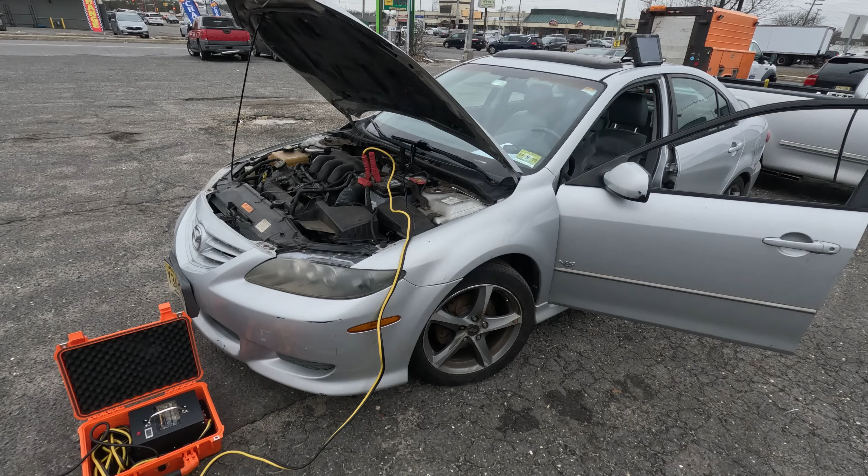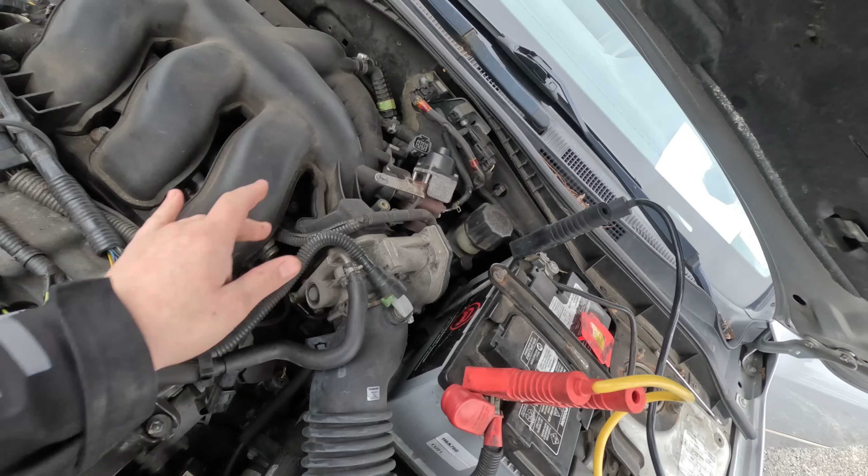I've got here a 2005 Mazda 6. Customer complaint, it's a crank no start. He has the EGR unplugged because he said it was ticking, or getting hot, he's not sure. Now there is a code for the crankshaft, but he said he checked it with a scope and he is getting a signal.

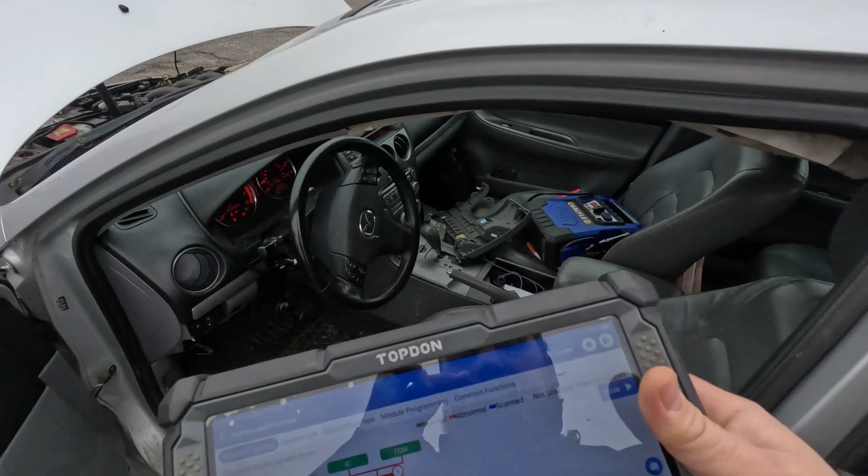So I don't know, I'm gonna have to look at that. So I did a code scan. And we have one code. We had two, but I erased them. This is what came back.

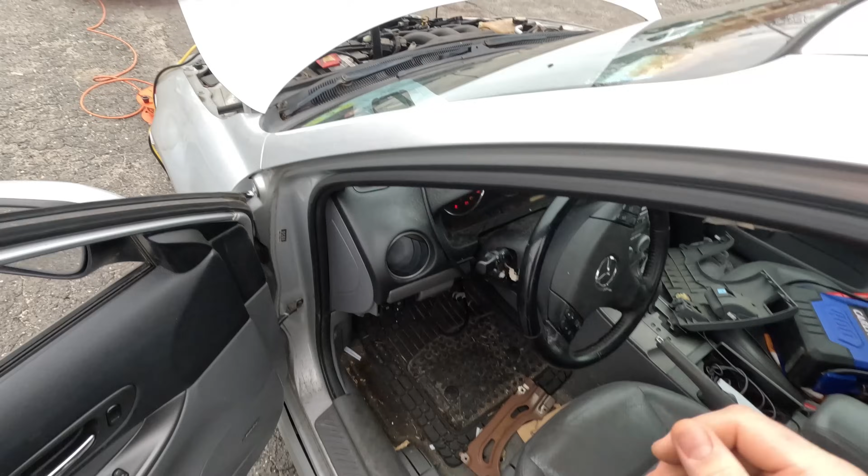P0335, crankshaft sensor circuit malfunction. The car is actually not a crank no start, it like starts and dies. Which is like, doesn't feel like a spark issue. It's right.

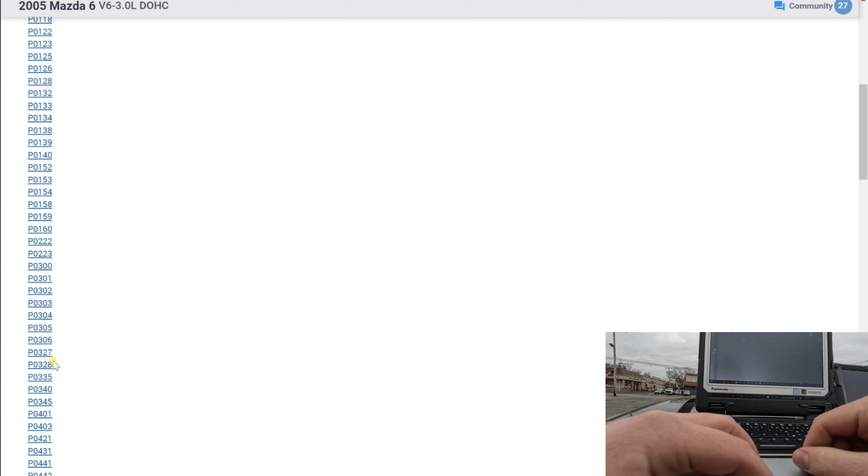Trouble codes, P0335. Okay, so it says here, let's just zoom in on this detection condition: if the PCM does not receive the input voltage from the crankshaft sensor for 4.2 seconds when the mass airflow is 1.95 grams a second or above, the PCM determines the crankshaft circuit has a malfunction.

This is a continuous monitor. MIL illuminates if PCM detects above malfunction during first drive cycle. Okay, so now this thing actually came back right after I cleared it, so even before I cranked the car.

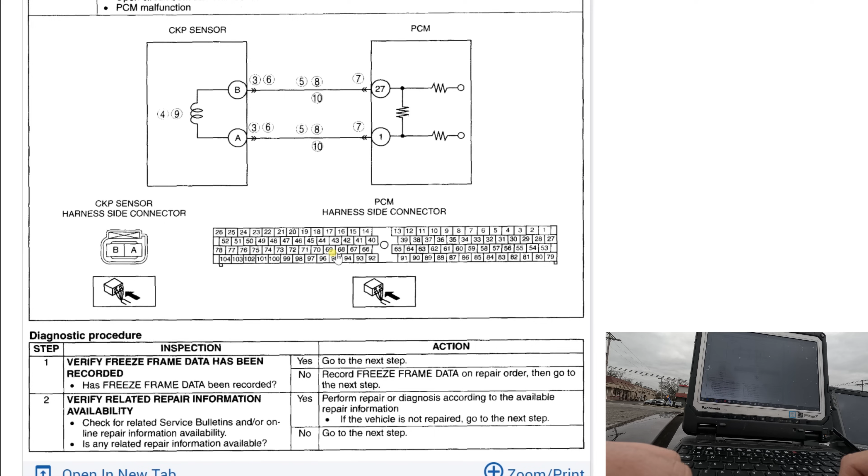That's funny, it's a pretty simple circuit. It's just a 2-wire sensor and goes to the PCM. So they're saying possible causes: crankshaft sensor malfunction, connector or terminal malfunction, crankshaft sensor is dirty, crankshaft sensor pulse wheel malfunction, short to ground.

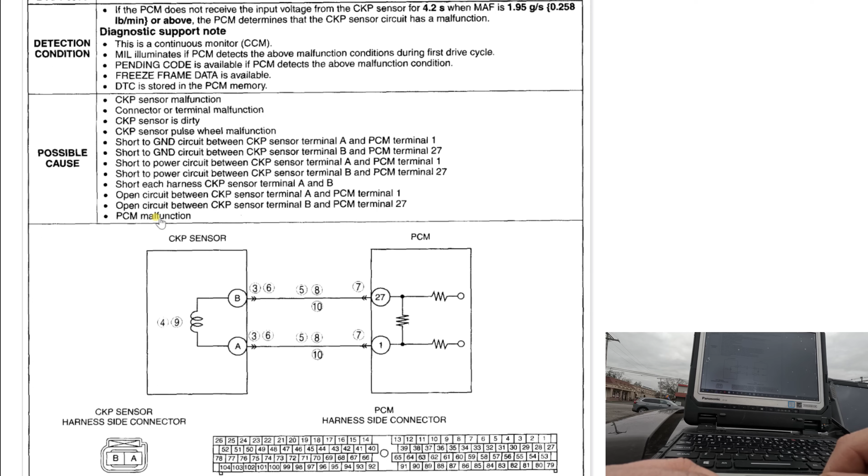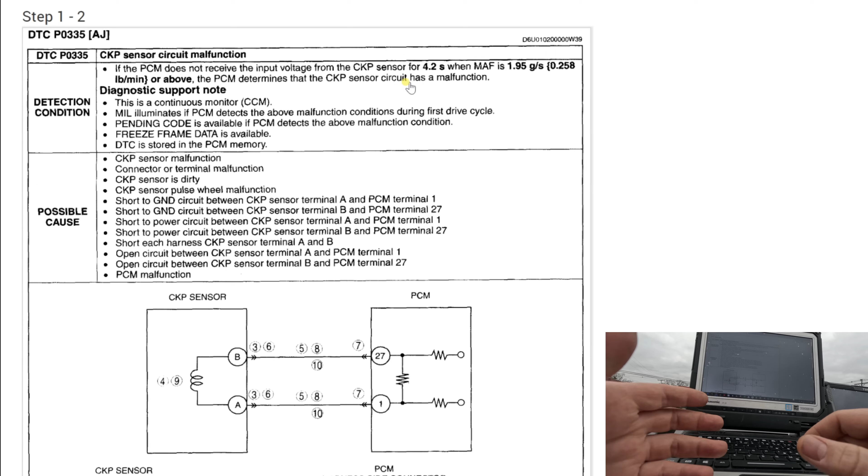So let's see, I would assume that there's definitely some sort of bias voltage on this wire, so it knows if it's open. So I would assume that's probably our problem and not the sensor signal, because how would it know with the car off?

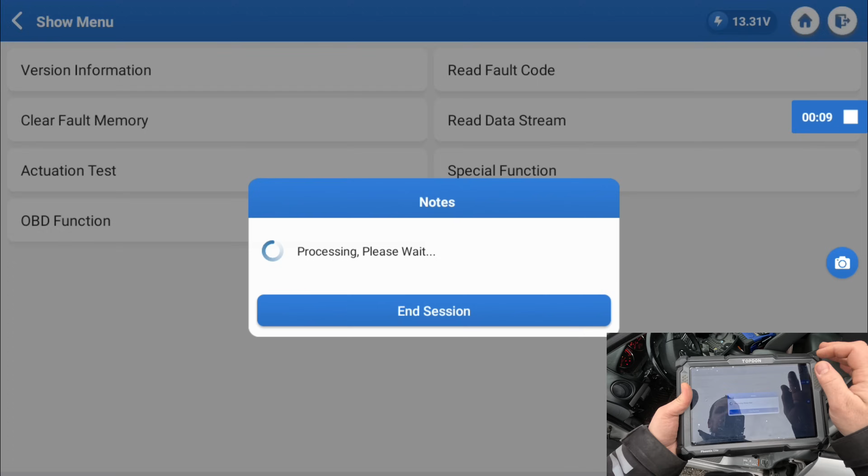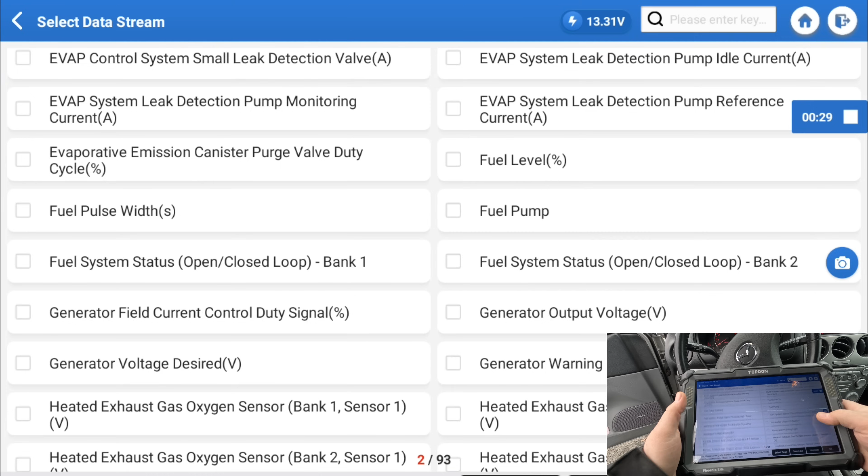All right, so I want to just check if the mass airflow is reporting anything. All right, so let's see here. Mass airflow volts, grams a second. Let's just see if there's anything on that. So there's nothing. Now when I crank it, it shoots up to 3 for a second and then shuts off.

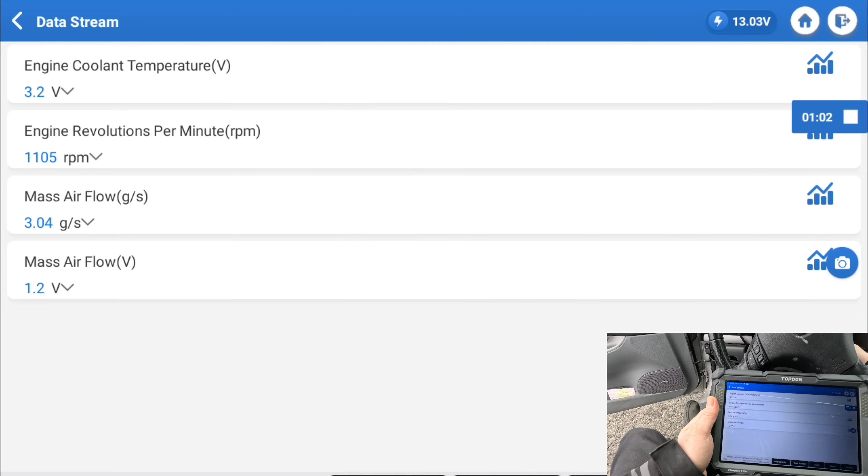And we're getting an RPM signal, so I don't... The RPM signal has to be coming from the crank sensor. I don't know, someone's telling me there's not a crank sensor problem. I don't know why the code's on.

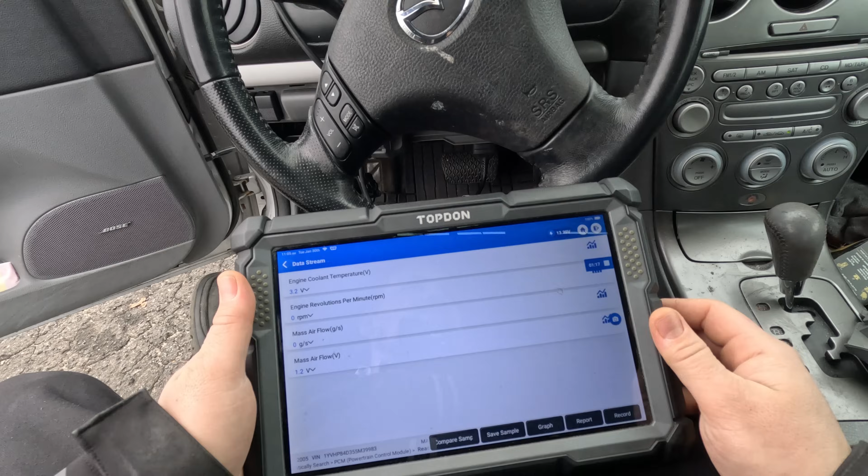Now, there is a remote starter on this, but there's no theft light. Just the way it starts and dies, that's telling me that there is spark.

Okay, let me try unplugging the mass airflow, because it claims the whole code comes from: the PCM does not receive the input voltage from the crankshaft sensor for 4.2 seconds when the mass airflow is 1.95 grams a second or above.

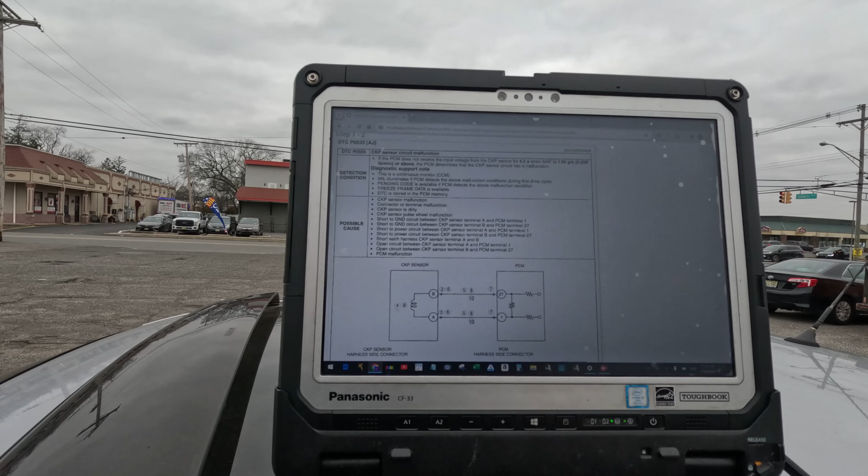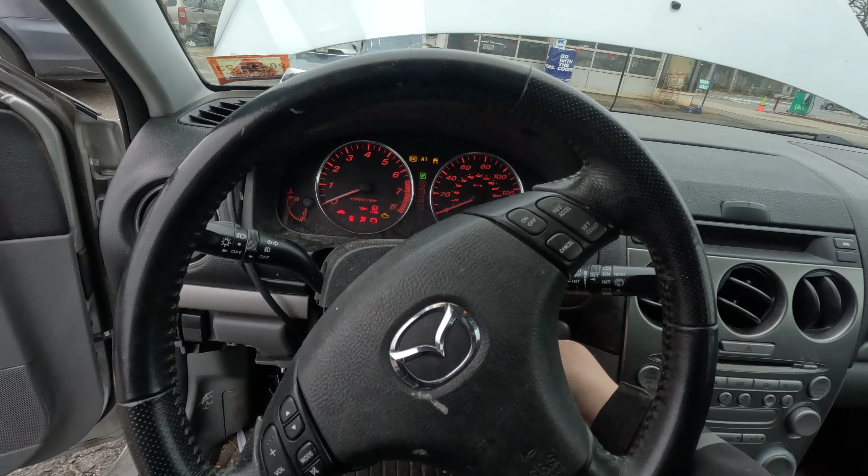So let's just unplug it. It's actually a Duralast, it's definitely not OEM. Let's see if the thing starts now. That's it, it's running.

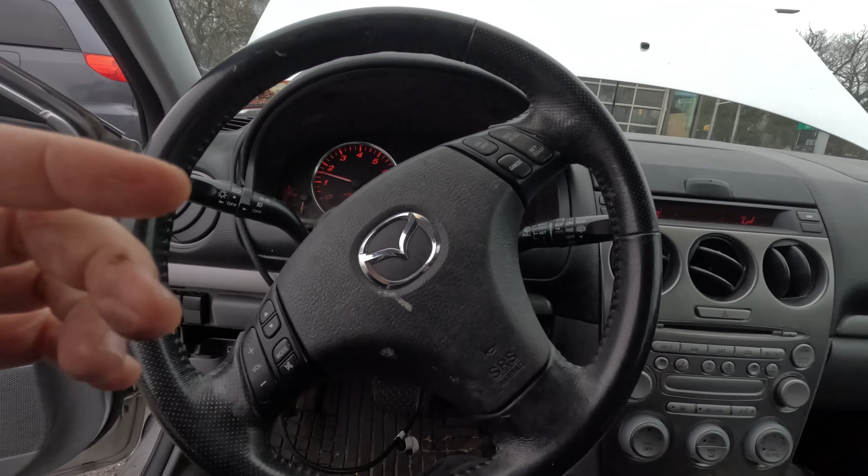Battery light's on. I have a maintainer on it. That is so weird. So it's running without a mass airflow.

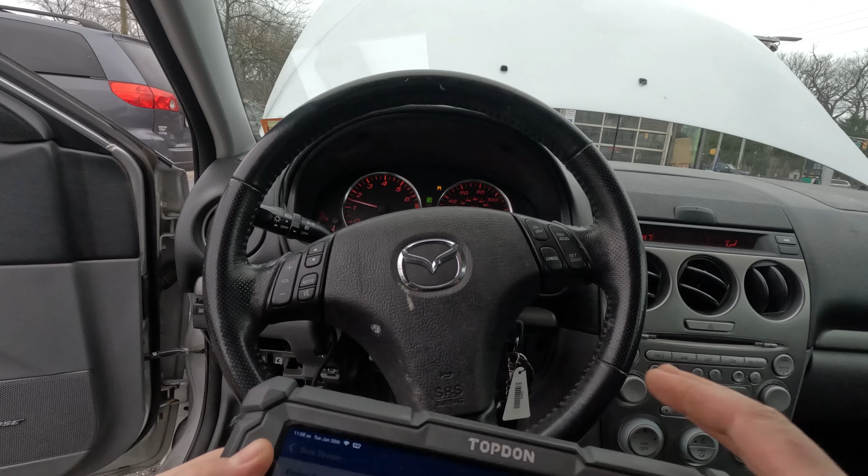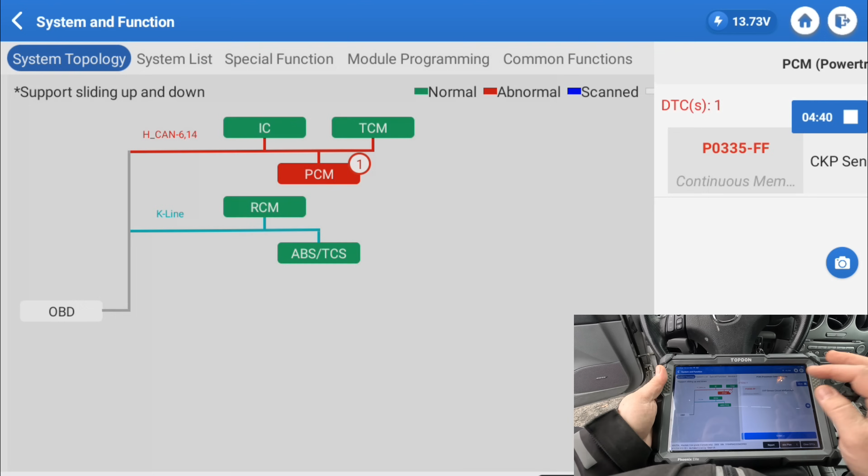Let's see where this thing's holding. Let's clear the code. It stalled the car, I cleared the code and the car stalled.

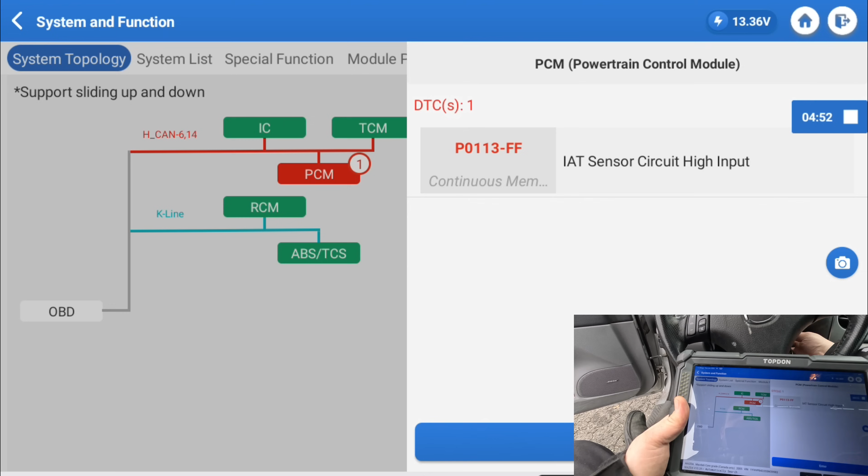Intake air temperature sensor circuit high. That's from the mass airflow. Let's... okay, no codes. Let's crank it.

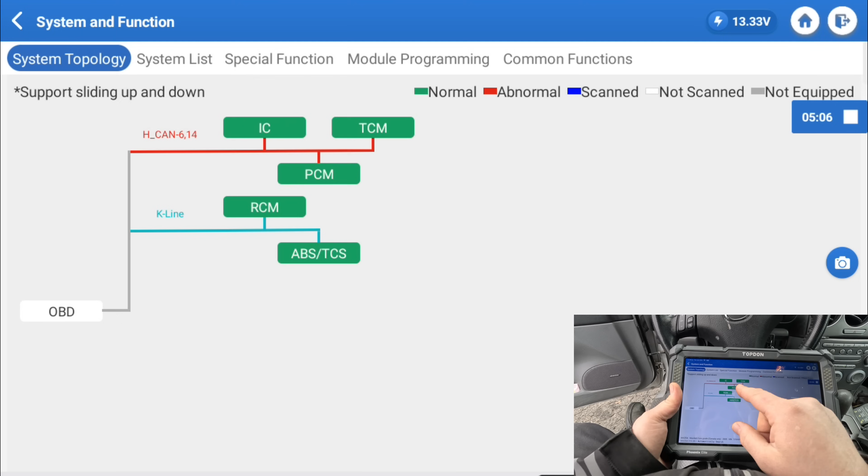Let's go like this. Last time the code for the crankshaft sensor came right back. It didn't come back now. Does the car start? The car starts and runs. But I did get a code, so let's rescan this.

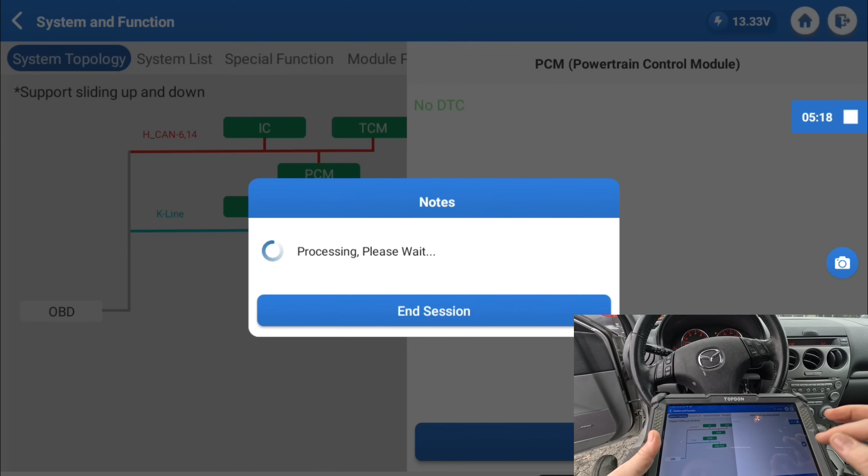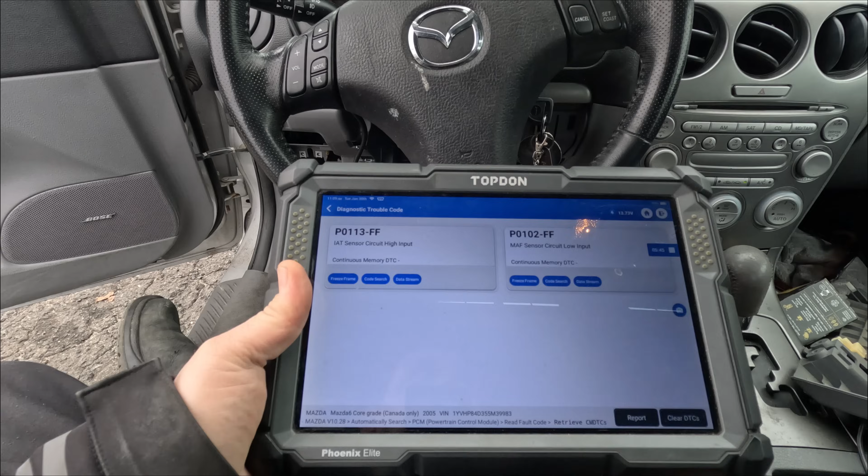Read fault code. Continuous. Mass airflow sensor circuit, intake air temperature sensor circuit. I think this is a bad aftermarket mass airflow that was tricking the computer and sending a 335.

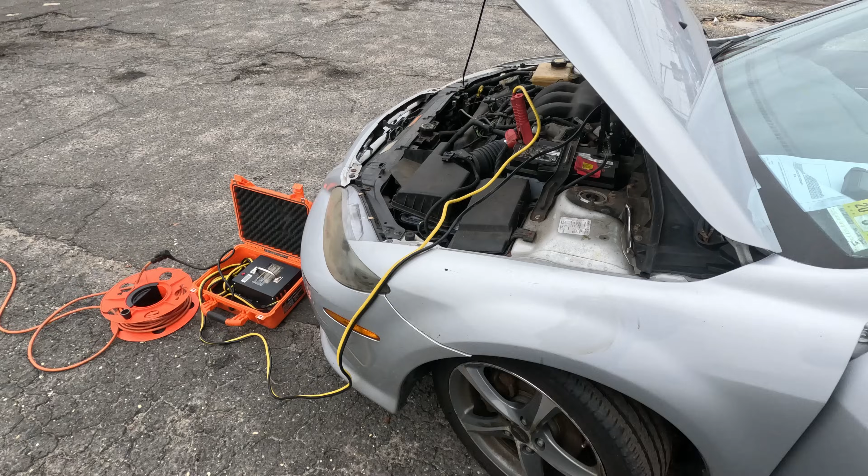I'm gonna go ask the shop owner if he has the original one. Okay, so the shop owner said he replaced this about a year ago, so he said he could order another one.

What I'm gonna do is I'm gonna plug this in, which makes sense. It's gonna stall, that's normal, a lot of cars stall. I'll just see if it restarts. I just want to check.

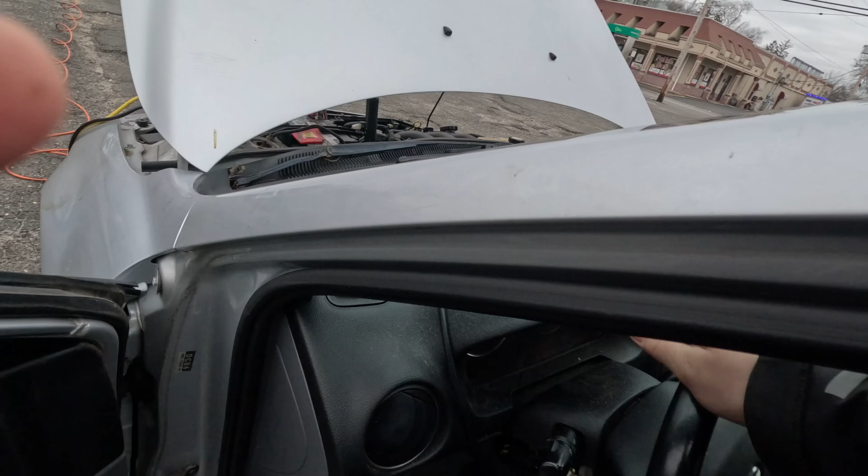Yeah, now it's starting and dying again. And we probably have the crankshaft code. Let's look again.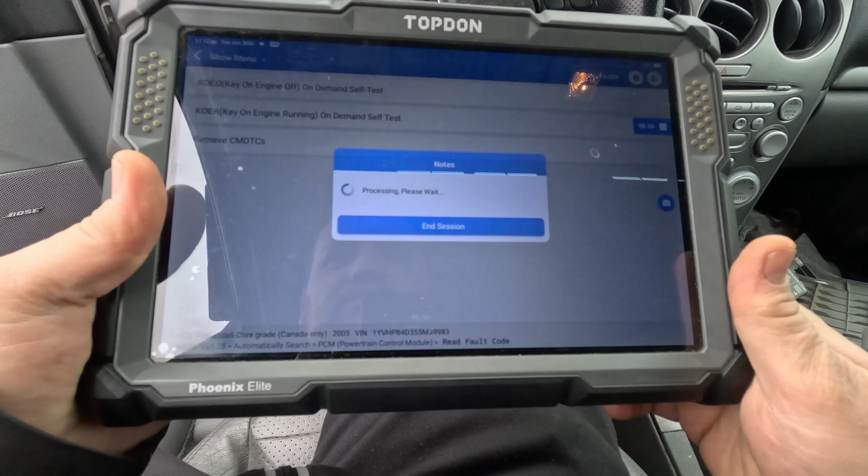Crankshaft sensor circuit malfunction. This is because it's unplugged, I'm not getting involved, I don't know why. That's separate. These two are from the mass airflow, and this one is because the crankshaft code's back.

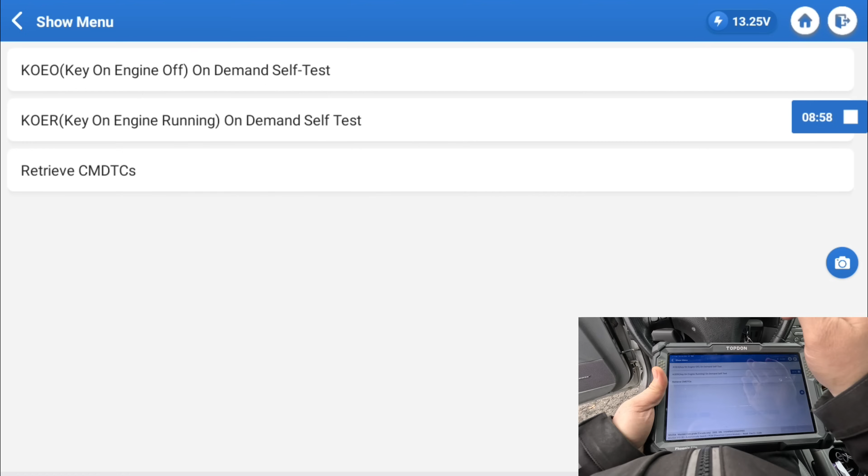So now I want to see in global OBD data. Actually, there might be an OBD function. This doesn't substitute values, I want to see if we're actually getting a signal from the mass airflow. So where are we? Enter.

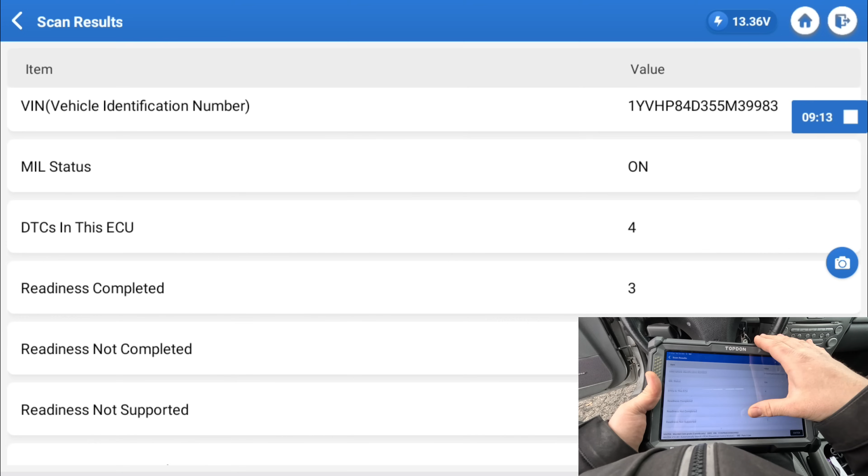Read live data. We're not getting anything, we're getting 0 grams a second. So does it show me the voltage?

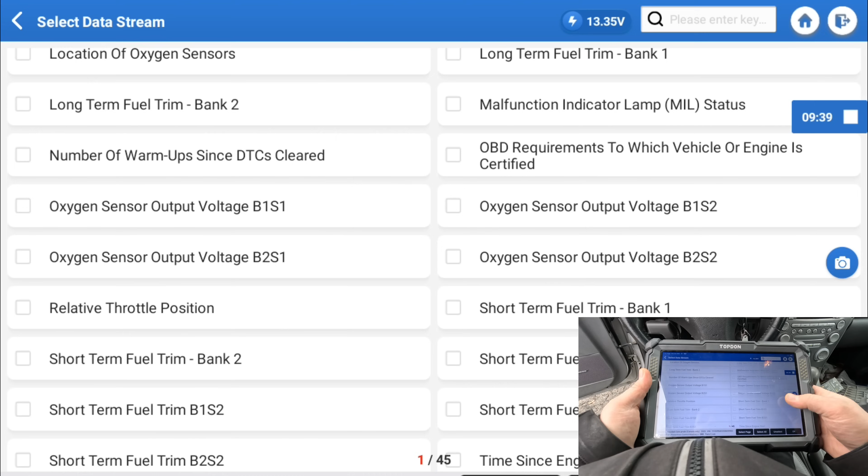Okay, so it doesn't show me the voltage, but over here I did have the voltage. Read data stream - I just don't know what's good or bad. I'm going to try to look into that. Engine, where is it? Mass airflow.

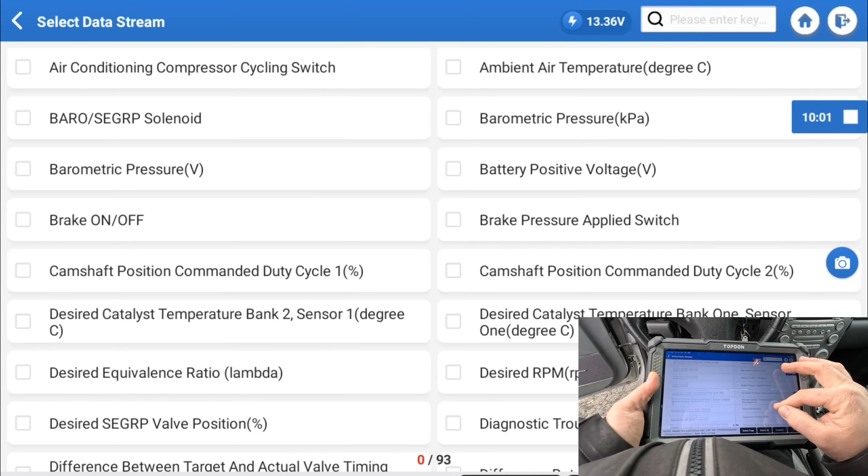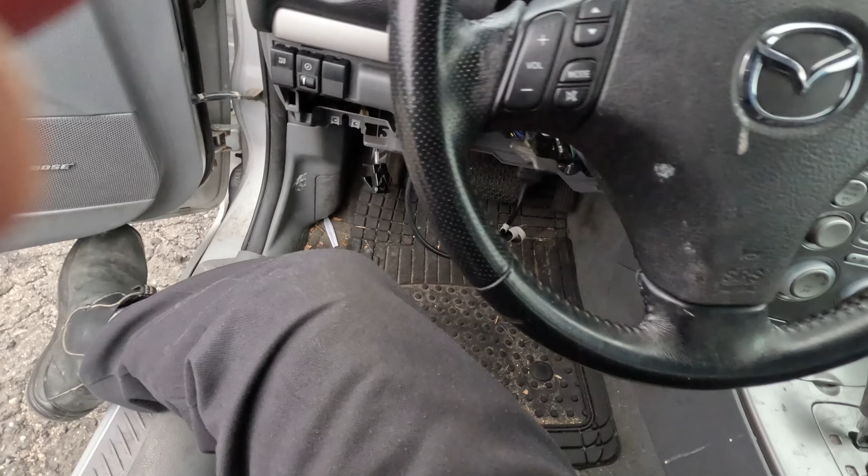So over here, the voltage is 1.2 volts. I'm going to look at service information and see if that's normal for the car off. But when I unplug it, it goes to 0, which makes sense. So it means the computer's not substituting it.

See, now it's at 0 volts. I might have to clear the code. It's starting and dying. Alright, it's running again.

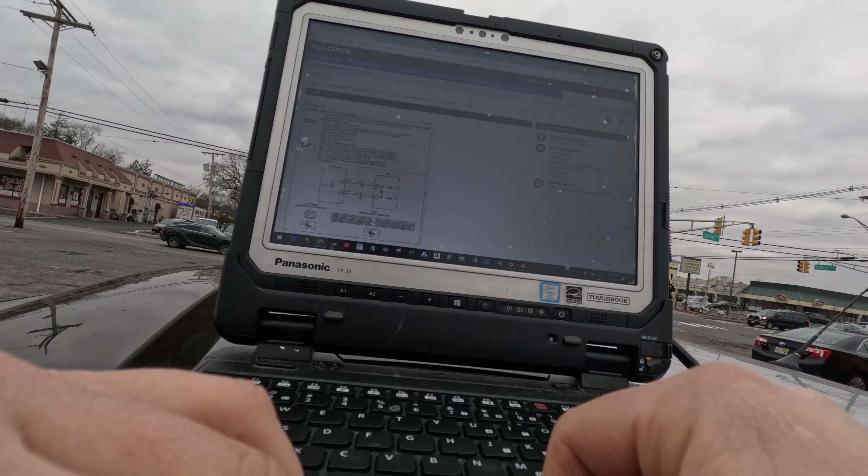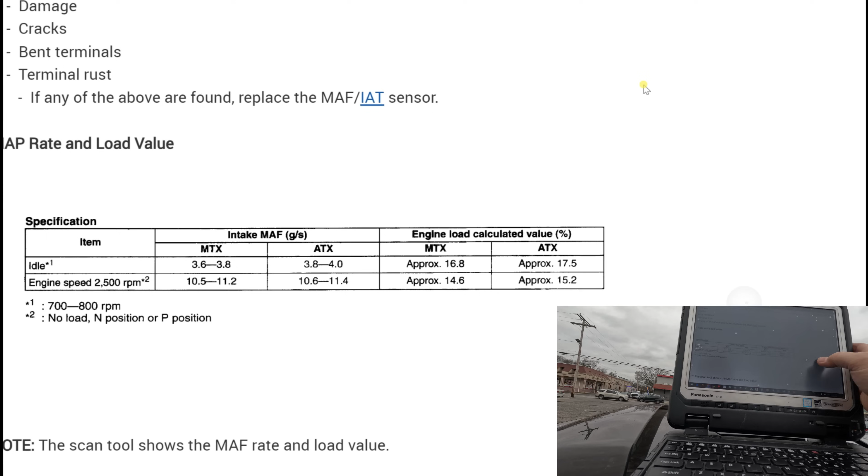Let me look around in service information. Let's look up the mass airflow sensor circuit. Mass airflow rate and load, grams a second. Yeah.

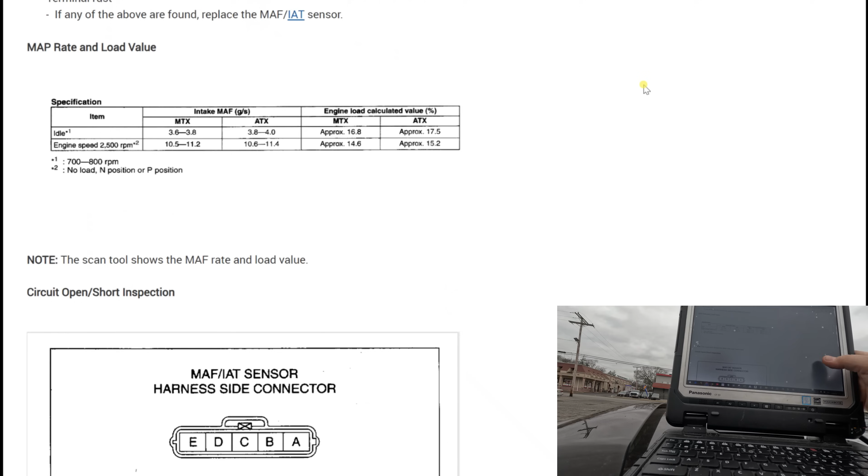Not telling me much. This is just that load. Let me just look up Mitchell, sometimes they're better at this.

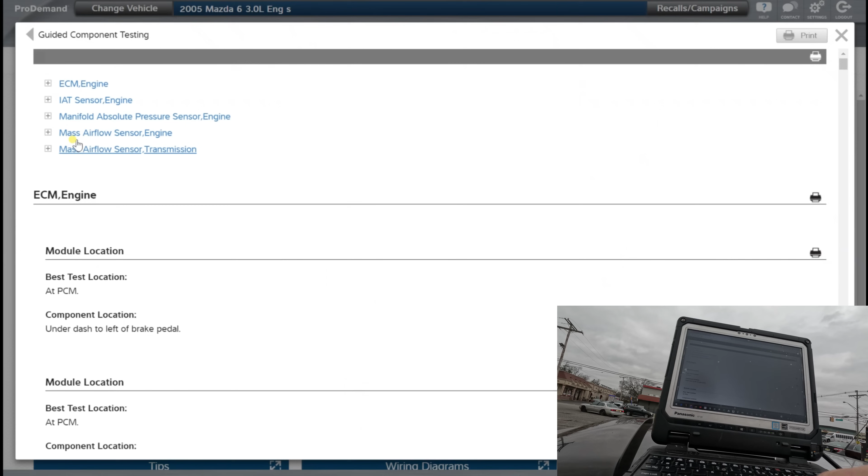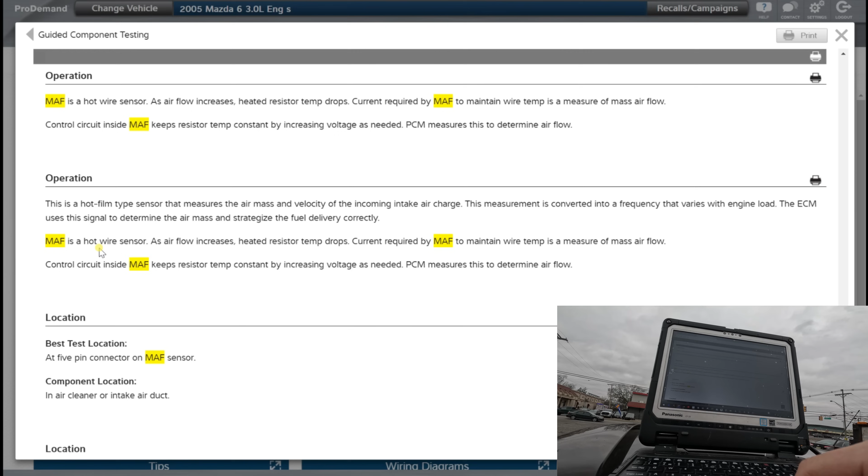As airflow increases, current required by MAF to maintain temperatures. Okay, fine. Hot film type sensor is converted into a frequency that varies with engine load. ECM uses the signal to determine the air mass and strategize the fuel delivery correctly.

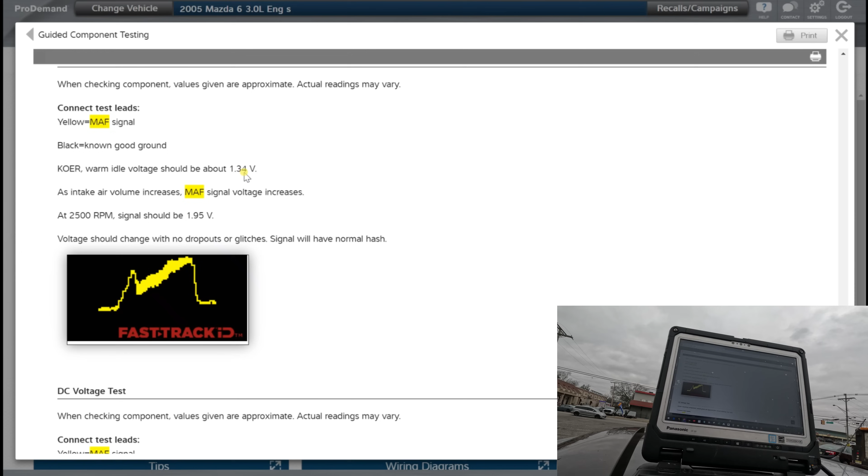Okay, key on engine running. Warm idle should be at about 1.34 volts. I don't know. It definitely seems like this is causing our issue.

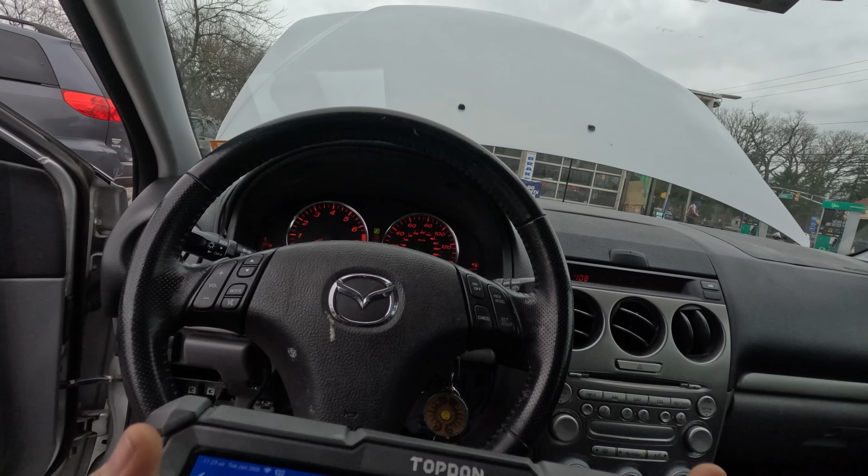One thing to do, I forgot to check, is the throttle - just to make sure the accelerator pedal's not in clear flood mode. Let's go to read data stream. Here, accelerator pedal, we'll go to throttle. Should be enough.

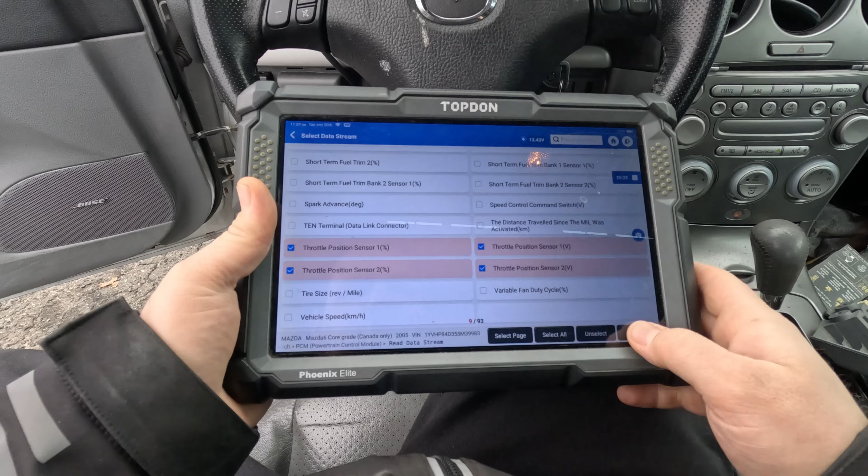Okay, so the actual position's at 0. When I go down, it goes all the way up. So that seems to be working.

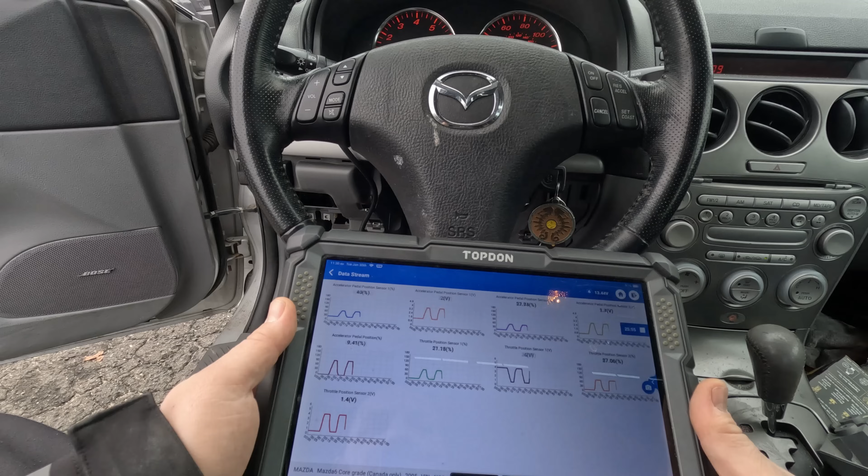Let's actually crank it with the throttle down. Alright, so that's clear flood. That seems to be working fine. Still get the start and stall.

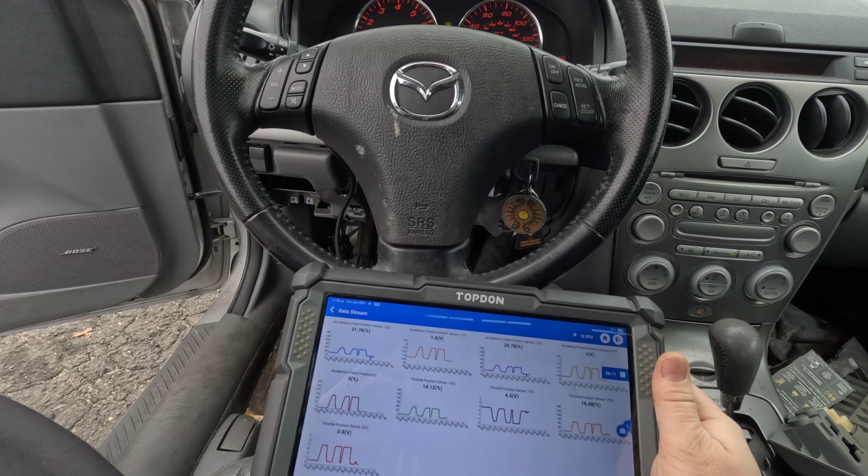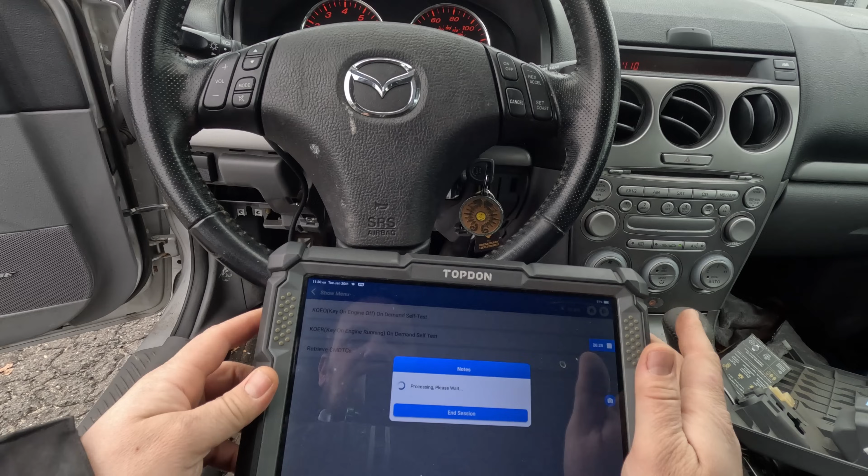And what's the code we have now? Read fault codes. We have the crankshaft code. Let's just unplug it again, see if I get it to start one more time.

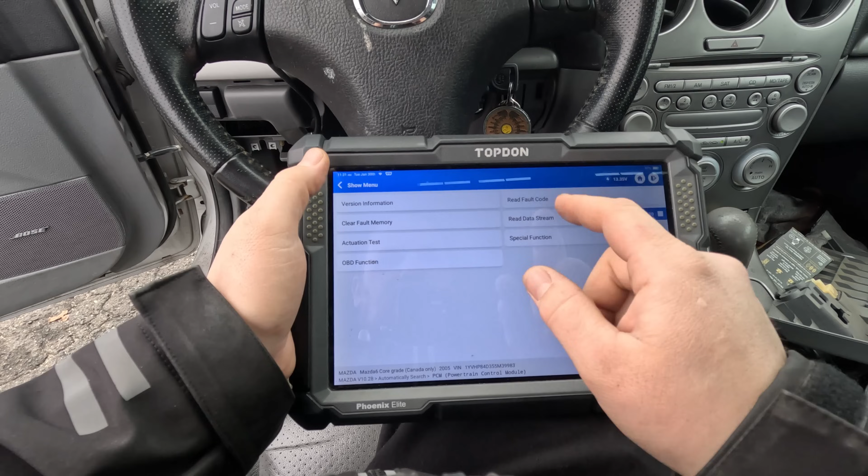Alright, now it's running. Let's see - read fault codes, let's just see if we have the crank code. We're gonna have it. I don't want to clear the codes because it's gonna stall. So let me just read data stream, let's just see if everything looks good. Otherwise...

Car revs up. Just want to know, because the battery light's on, so I want the generator.

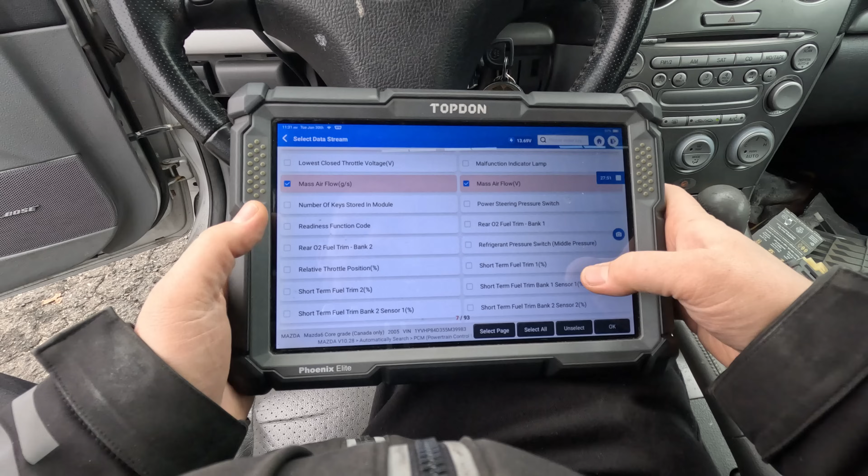Mass airflow, we're not gonna have anything. Short term. Alright, desired RPM is at 900. That's what it looks like we're at. We're in open loop because we have no mass airflow.

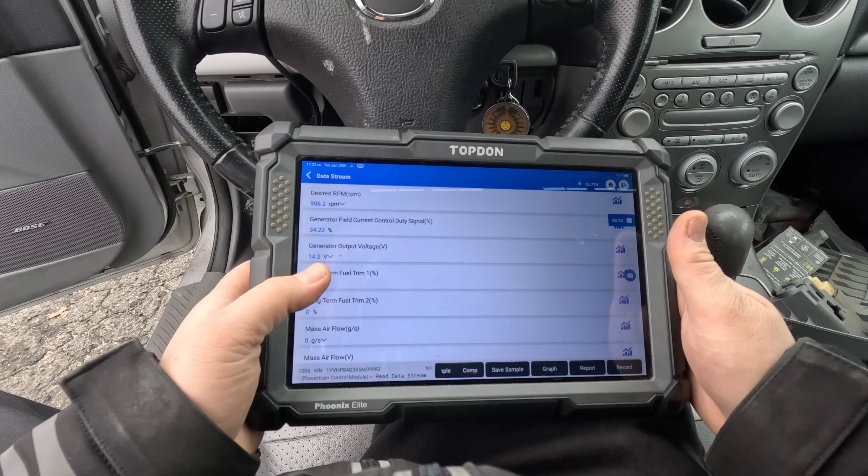I don't know why the battery light's on. Let me disconnect my maintainer and see if the battery light goes off.

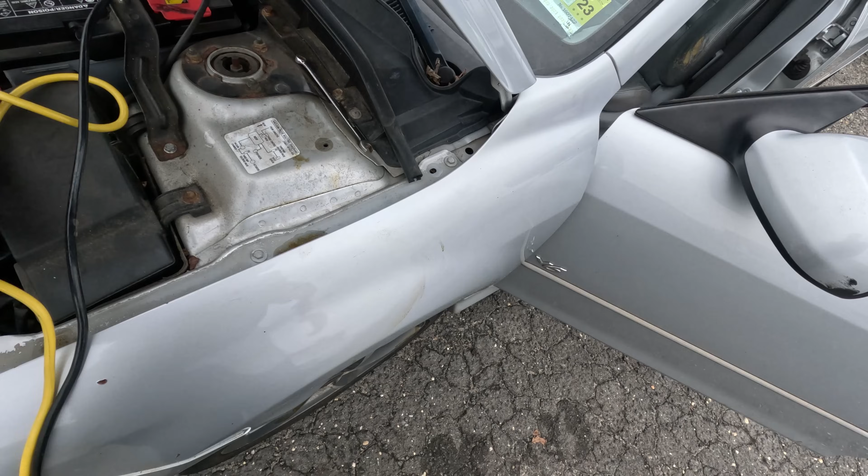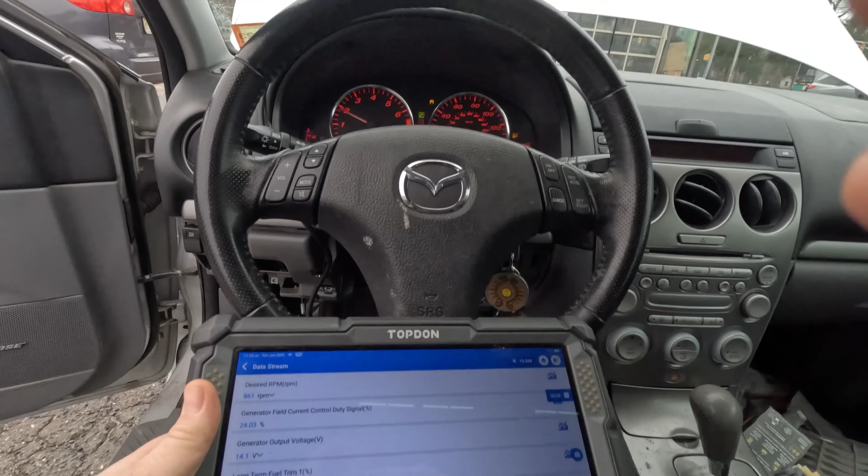We're still charging, so I don't know. It's up to them if they want to fix that. It could be just because of the mass airflow.

I think we got to fix one thing. I think this is definitely our issue. I'm going to see what happens. I'm going to ask them if they ordered a new one.

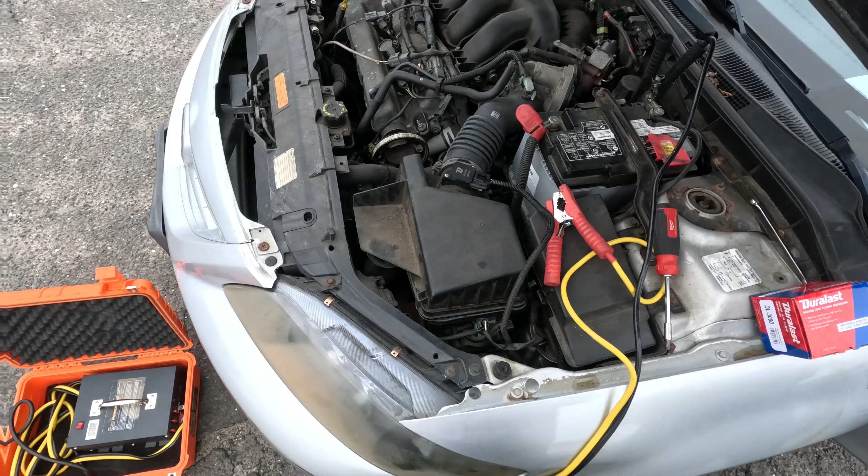Alright, so we put another sensor in. It's also a Duralast, so hopefully it'll be better. Keys on.

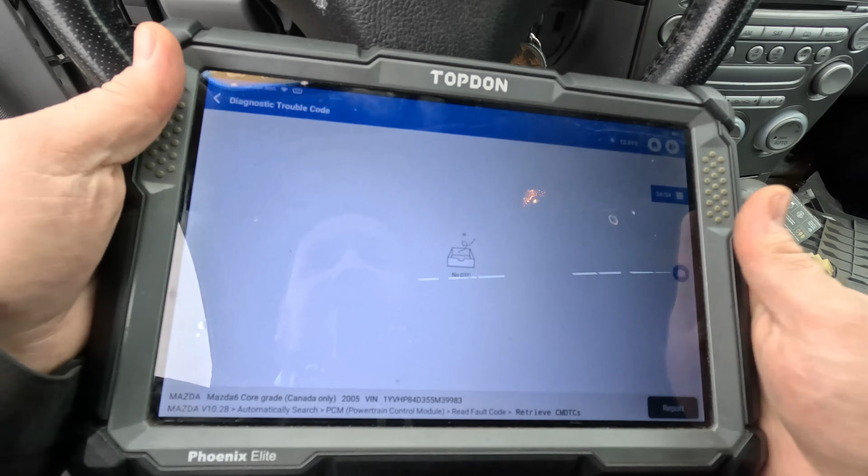Let me just see, so I cleared the codes. Just want to cycle the ignition and see if that code comes back. That was coming back every time. It's not coming back now, just one more thing.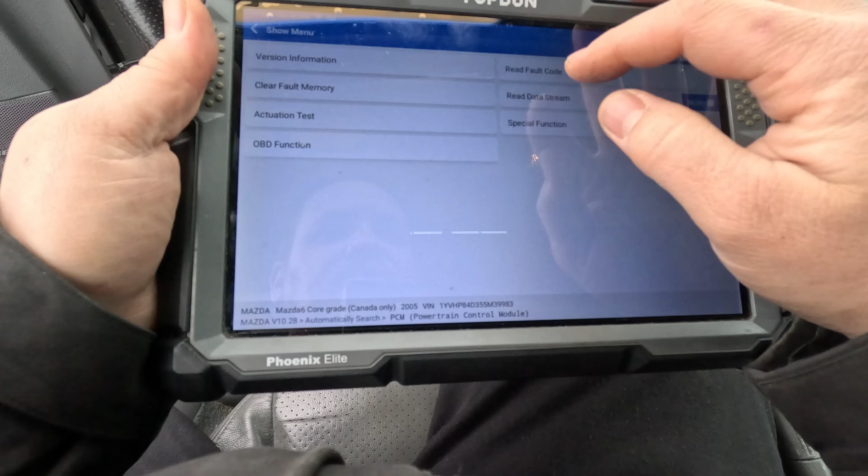Let's go to read data stream, I want to see what the sensor's reading. There we go, 0.6 volts. Before it was giving 1.2 volts when the car was off. Now it's giving 0.6. Let's see if this thing starts.

Starts right up, and it's idling lower. Let's see if it's going to stall out. This car starts. Runs. Now we're at 1.4 volts.

It almost was like the car was running - we were at 1.2, now we're at 1.4. I think this is just a bad mass airflow sensor.

Yep, starting every time. To show you the car's running, there's no codes, and the battery light's off. So somehow the mass airflow is causing the battery light to be on.